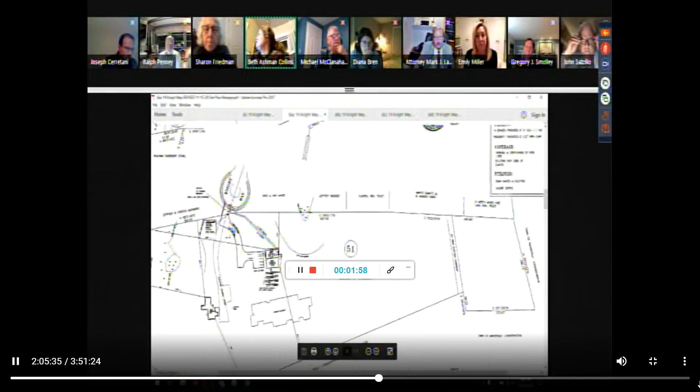let's just, I don't know if Joe, you want to, and Jen can share at least the list of correspondence up on the screen. Yeah, I see it now.

That I have. Okay, this is a memorandum to Sean Burke from Joshua Rienke, engineer, and Richard Alves, town engineer of Mansfield. Subject is site plan application, 19 Knight Way, proposed Montessori school. Note, new site plans and drainage calculations submitted by RIM Engineering dated 11/15/20. The engineering division provides the following comments and questions.

Number one, the project will result in a land disturbance of 1 or more acres, therefore an NPDES, NOI, and SWPPP must be submitted to the town for approval. Number two, provide a detail of the proposed oil and grit separators. Number three, only 24 inches of cover is proposed for over CB number 1, accordingly the pipe materials should be changed to ductile iron or blue brute.

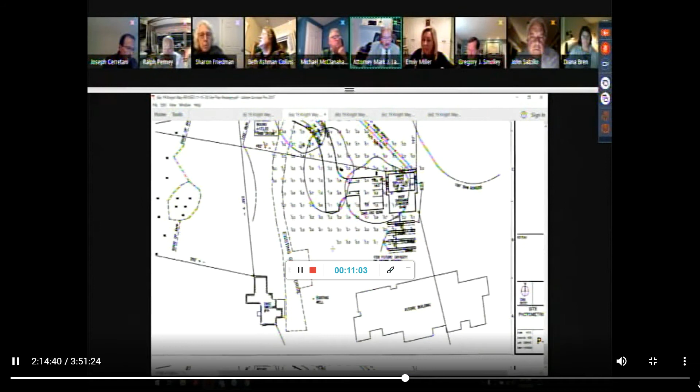You mentioned, Madam Chairman, that you've heard a lot about this property, this project. It certainly has a history in the town of Mansfield. But when I say the project, I'm referring to the project that's depicted on the plan as the larger building, that is not before the board this evening. What's before the board this evening is a much smaller building. The building that's ultimately built will be about 17,000 square feet. The one that's the subject of tonight's site plan application is about 1,200 square feet. It's a rather small building. It is designed to be used for up to 30 enrollees in a childcare facility. There may be some incidental elementary education that goes on there. Associated with it is a driveway, a parking area, all shown on the up-to-date site plan. And there's lots of other details, and I realize you received lots of information about utilities and other matters that really aren't within the scope of the board's review for a site plan for a Dover Amendment use, but it's all useful information. We can respond to some of the questions about those issues that have been raised. However, our view is they're really not within the board's purview.

Well, no, just to stop you there. The site plan process, you present your plan and we get to ask questions. The Dover permitted use certainly puts a weight on the scales, but it's not a full exemption from going through the process of presenting to the board and listening to questions.

Yeah, and I just said that we will gladly answer the questions, even though many of them, for example the size of the water line, the location of the fire hydrant, the electrical service, none of that is really within the board's purview. So the fire suppression and public safety is of no concern in the state of Massachusetts, I'm afraid? It is, no, absolutely.

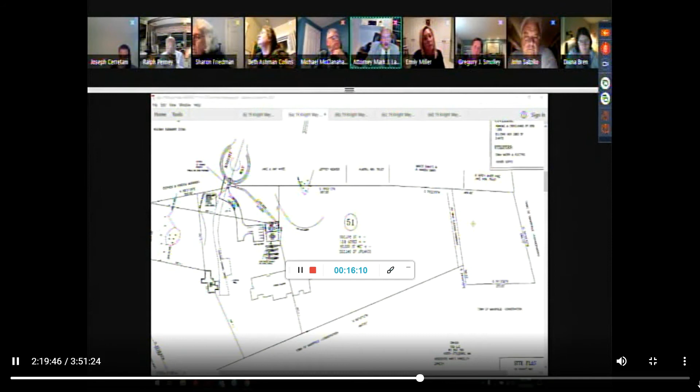When the main facility is constructed, when that time comes, of course, we'll be back before the board for site plan review and approval.

The total square footage of the main facility and the one that's before you this evening will not exceed 17,000 square feet, which is the size of the main facility. The total enrollees in both buildings will not exceed 200. So I just wanted to make that point about the relationship between this small facility and the larger one when it comes. But again, the only thing that's before the board this evening is the smaller one.

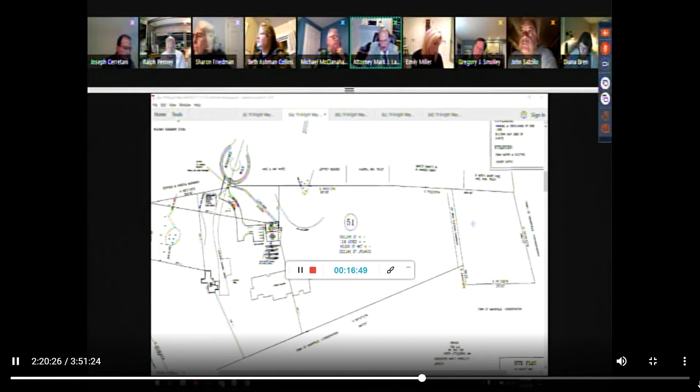Again, you have a drainage plan for the parking lot. You have a photometric plan for the lighting. And I think we've provided everything that the board and the staff has asked for, and we can answer the specific questions that have been posed by other town officials if you'd like.

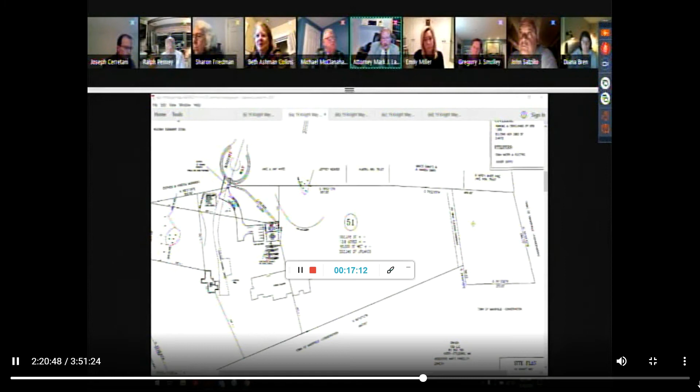Do we have any pictures of or any type of plan of the proposed buildings at all, other than what I saw in the plan? It was just this typical layout right here on this plan.

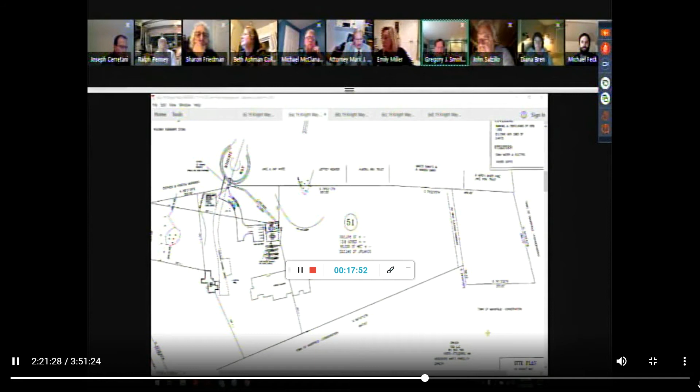I'm going to defer to the building designer, Mr. Smolley, who's in the meeting, to respond to that. Yes, we had provided to you a floor plan, sections, and a rendering of the building that should be in that set that you're looking at.

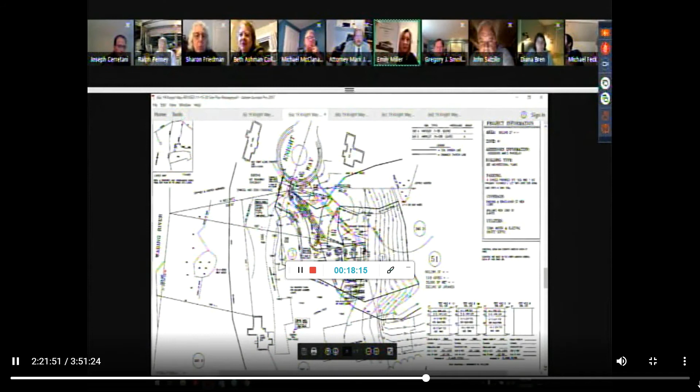Can you pull it up on the screen? It might have been dropped off December 2nd. If it's possible to share my screen, I can show that to you. That would be great, that would help. And how do we do that?

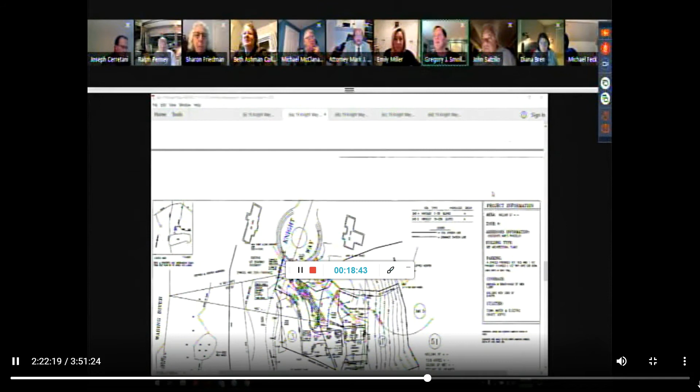Okay, if someone can guide me to where share screen is, I will do that. Jen, are you there, do you have instructions for having him share the screen? I've made Attorney Lanza a presenter. Good. He should, I don't have the plans. It's really Mr. Smolley that should be able to share. Oh, I'm sorry. With the board. Stand by. Okay, Mr. Smolley is the presenter now. Let's see what we do now. Find the right screen.

I didn't know there was going to be a quiz, sorry. You've been patient and we will be patient too. We'll make it all work one of these days. I've got it in front of me, I just can't get it to the screen that you people are seeing. So you're moving it in the right direction, keep moving it the way you were.

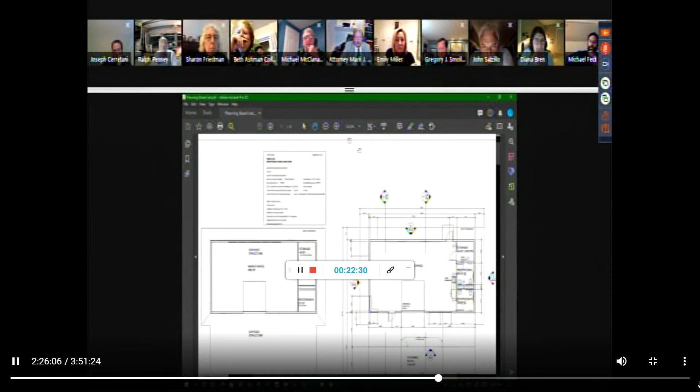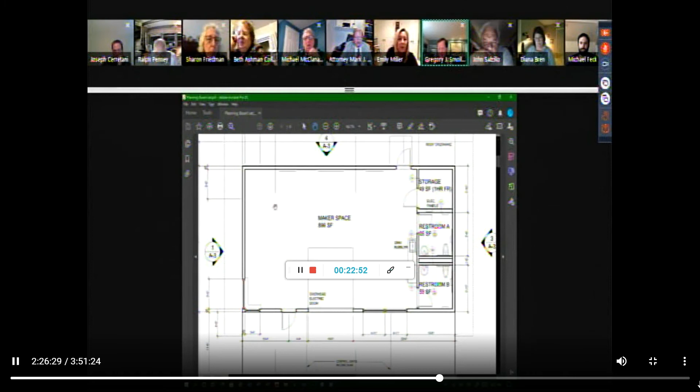There we go. So that's the floor plan. As Mr. Lanza was saying, a relatively small building, about 1,100 square feet net, about 1,200 square feet gross. It's a large open area with 2 restrooms and a storage area.

A simple floor plan, simple building. It has a covered patio area of about 1,200 square feet, open on all 3 sides, backs up to the building, and just continues the roof line out over that area.

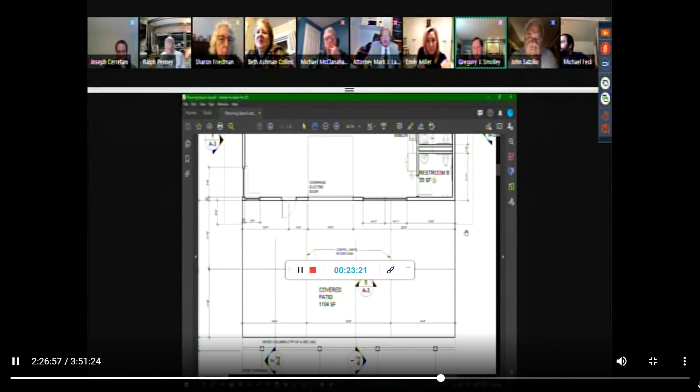There's a section through the building: interior of the building, the open area outside under cover, a single pitched roof line. We're about 12 to 13 feet high back here, about 15 to 17 feet high out there. So certainly within residential standard for height and certainly area.

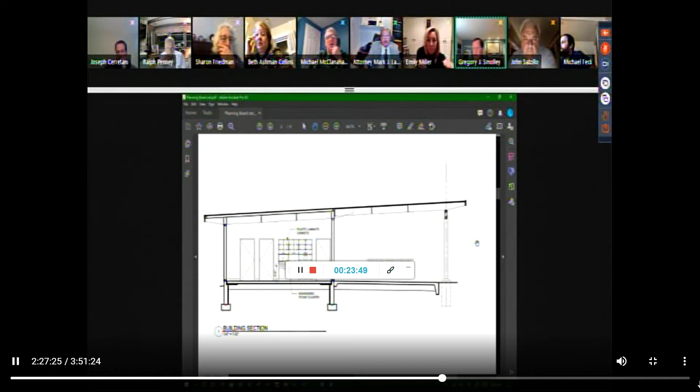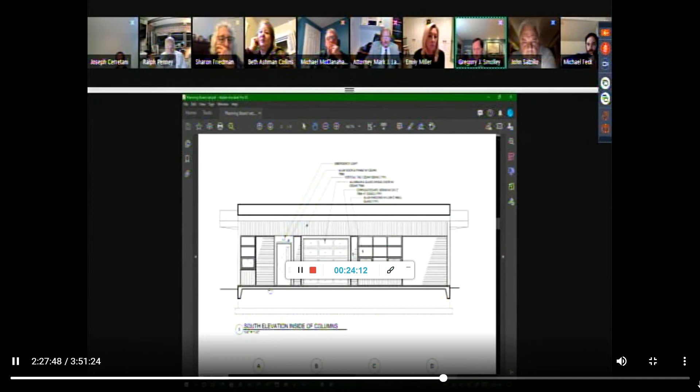Section going the other way, looking through it, same piece. This is looking in underneath the canopy in the covered area. There is cedar siding, some windows, operating windows to the bottom, fixed windows above. It's an overhead door to allow the activities inside to spill out to the covered area in front of it, an entry door and window on the corner.

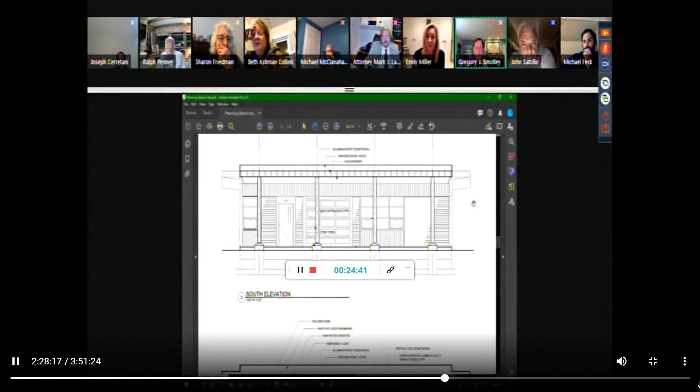You're saying this is a classroom? This is designed to be as flexible a space as possible. It can be a maker space, a classroom, a place for small children. It looks like a utility room to me. It can ultimately be a garage if so needed when the main building is built.

The entry side of the building from the parking lot side has cedar siding, some metal siding to complement that, a single entry door and 4-foot overhang to that side. Rendering of the building showing the metal siding, cedar siding, windows at the corner, and the roof over the outdoor learning area. A fairly straightforward building, not much to be seen or changed on it, frankly.

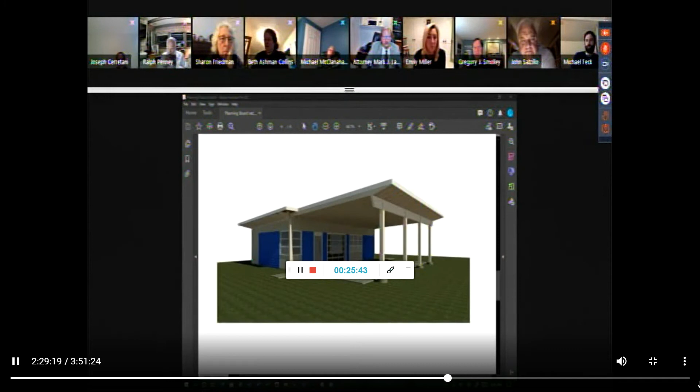The next two drawings I have here are the photometrics. If a question comes up on those, we can certainly talk about that. Thank you. Are there other specific questions from the board?

Yeah, but you're submitting this plan as a classroom for 10 to 12 people, and it looks like a garage to me. I think you're trying to build a garage and supersede it so you can build a school later. That's in my opinion.

The building space is for a childcare facility. Childcare facilities are strictly regulated by the state. It wouldn't be able to be open and operate until the state inspects it and certifies it for a certain number of attendees. I don't know what else to say. That's the proposed use, and that's going to be.

Yeah, but I think you let the cat out of the bag. You said it could be a garage later. So you did say that, correct? He did, but that's after it's closed and the main building is built.

Okay. I'm not impressed.

Beth, I have a question. It follows along the lines of the maker spaces being built in virtually all of the new schools across the state of Massachusetts, and it follows closely with a STEM-based hands-on learning protocol which encourages kids to go inside and out. It's facilitated best with an overhead door and a large covered area, giving teachers and students the chance to move in and out of the building. Though the aesthetic changes, the fundamental function of the building doesn't. Thank you.

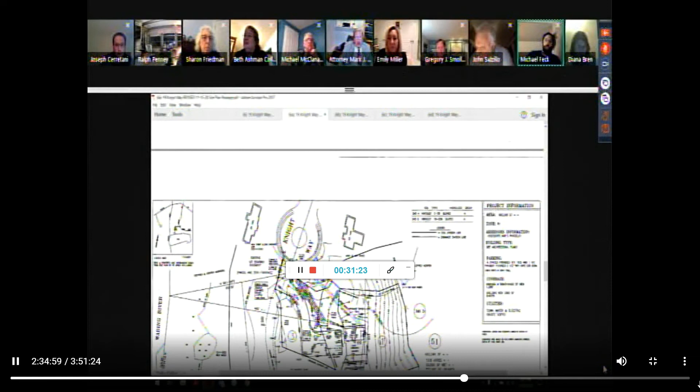The traffic study showed that it was more than adequate to handle the traffic generated by the facility, and the judge so found. What did the traffic study opine about the public roadways and access to and from? Same conclusion, and we can provide that study to the board—it's in fact a public record because it was in the land court case. Well, that's why I saw it in the land court case—there was an expert that discussed trips per day, what it would be on the road, what the intersection grades would be at the intersection of Knight Way, if any improvements would be needed, and that's what I was curious about.

So I would really love to be able to take a look at any traffic studies you guys have. Yes, we did—we had a traffic study done by a well-known traffic expert, and then also an issue came up about queuing of motor vehicles when picking up and dropping off enrollees at the larger facility. So we even have a separate, I'd call it a mini study, on that particular issue. And again, in that case, the court found there would be no problem with queuing, meaning backing up of motor vehicles from the property onto Knight Way.

And I'm looking because in reading their decision on that, it sounds like they're leaving a lot that there could be improvements made if something didn't work, but really those improvements are only going to work if somehow it's conditioned in the approval that these issues need to be addressed. It can't just be—I don't think he would write that in there saying, well, out of the kindness of their hearts, if there's an issue, they're going to improve, widen the roadway as he puts in his decision, or extend roadways on site, things like that.

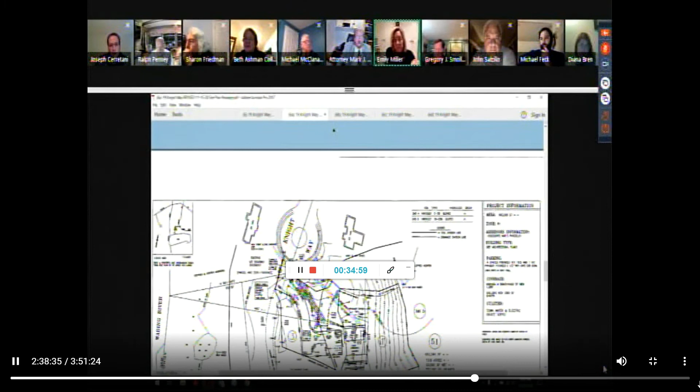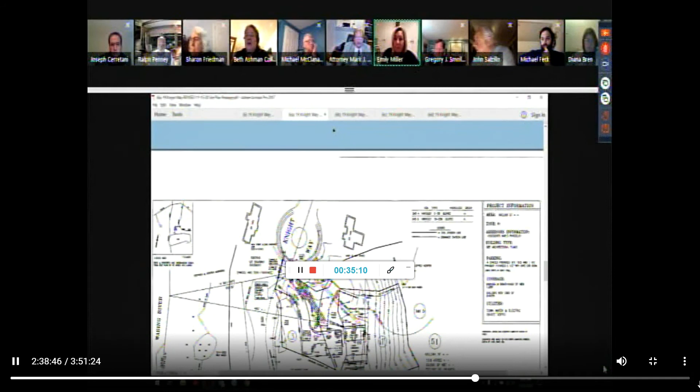I have an actual traffic study done at our facility. I don't remember how many students were enrolled at the time, but it's far more than 30 - I can share with you that Jennifer Conley did it on site. So it's actual numbers based on enrollment at that time, which I think was at least 2 or 3 times more than what we're proposing. So that might be helpful for you. Yeah, that might be helpful, definitely in addressing Mike Feck's question.

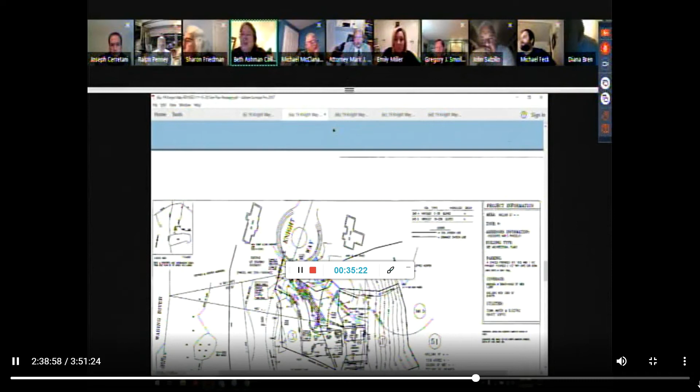Can you tell us how that car line queuing works on this site plan? Because I need to be oriented. It hasn't been approved yet, but once it's approved, there'll be a queue in and out at certain times. I haven't done that yet because it hasn't been approved. But I've been doing this for 19 years, and as Judge Long said, I've been pretty efficient at it.

I can give that to you, but because the building doesn't exist, I haven't established that just yet. I have it established in the facility I'm at, and I have 68 students there, again with no driveway or entryway, and a very small parking lot that is probably at 50% capacity right now, and it works.

So where would the car line queue be? Would it be on this driveway that's shown? It would be - there are 2 driveways there. There's one to the residence, which is a long gravel drive, and then the one that I'm going to put in for that building, and so it would be in that paved area. There's 13 acres, so there's plenty of room if somebody else needs to.

I guess I'm just not seeing - I'm seeing 5 parking spaces, but relative to those parking spaces, where would the cars drop off for the car line queue you described? They would drop off coming in, driving up to the building, turning around and going out. So, again, this hasn't been approved yet, so I don't have an exact line to give you.

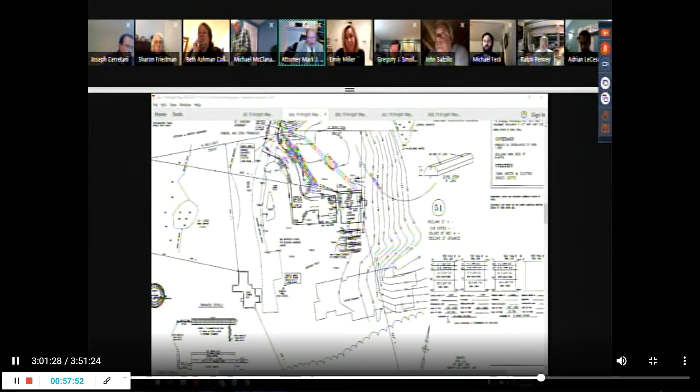That's correct. And is there any provision in the traffic study for installation of a traffic light at that intersection? No, there are not. The traffic engineer concluded that it doesn't even come close to justifying a traffic light at that location, even with full enrollment in the larger facility. And even if it did, that would have to be vetted and approved by the State Mass Department of Highways, and that approval process would occur after the building is built and operational?

Yes, and again, I'm referring to the larger building shown as future building on the property, for which no plans have been submitted other than the sketch that you see here. Thank you.

Is Nicole Mullen with us? This is her husband, I'll speak. Joe Mullen, 3 Knight Way, right on the corner of Justin and Knight Way.

Obviously we have a number of concerns. I want to talk about 3 major points that I think are going to impact our community and neighborhood. Number 1, we have a school bus stop right on the corner of Justin and Knight Way, and safety for our children is a concern. There are 3 different rounds of pickups, so there's constant traffic going in and out of our road, putting children at risk.

Number 2, the width of the street doesn't meet the requirement, especially in the winter when it's snowy and there's a ton of snow all over the place. It's going to make it very difficult for our kids to actually get to the bus stop safely.

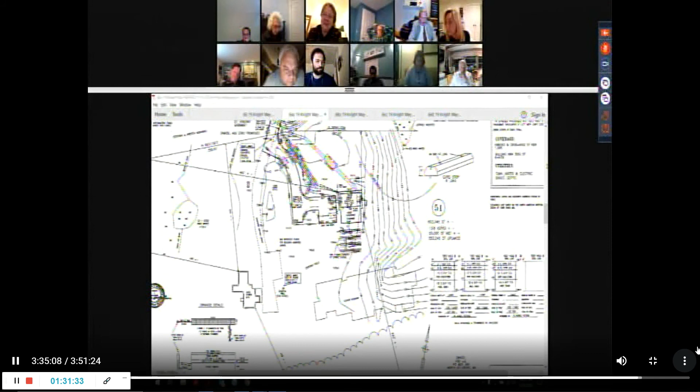This is Justin Parada, can you hear me now? Yes. Okay, sorry I missed when I was called on before. I'm an attorney, I represent several homeowners in the neighborhood. I wrote a letter to the board that I would ask be put in the file.

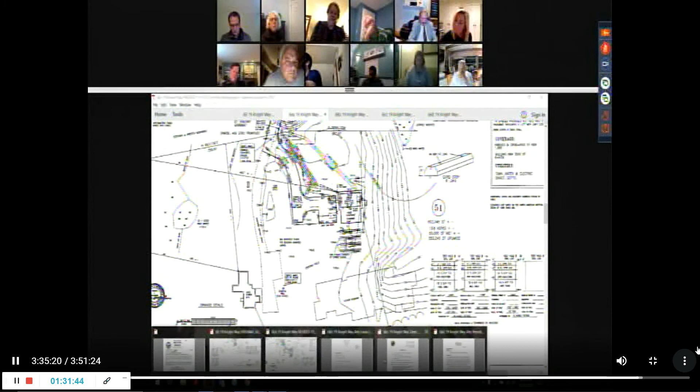Our position is that despite the Dover protection here, this board really shouldn't act until the ZBA acts. This is a non-conforming lot as to both frontage and a lack of public access. A private easement doesn't satisfy the bylaw, and therefore the ZBA should give a Section 6 finding before anything else happens here for an expansion of a non-conforming lot.

And although Dover may offer some protection, because this is a dual use - there'll be a residence and a school, even the smaller school - there's not really case law supporting the notion that a Section 6 finding isn't required in that instance. So I would posit that this board should table this until the ZBA acts. I'd be happy to answer any questions the board might have.

Is there currently a hearing scheduled for the ZBA? I'd like to respond, if I could, Madam Chairman. Please do. There is no application or anything pending before the Zoning Board of Appeals.

The issue of whether or not a Section 6 finding is required was addressed squarely in the first land court case decided under the name of Ellsworth versus the Town of Mansfield. Judge Long squarely addressed the issue and said it is not required. The Town of Mansfield was a party in that case. There was no appeal. That issue is decided at this point.